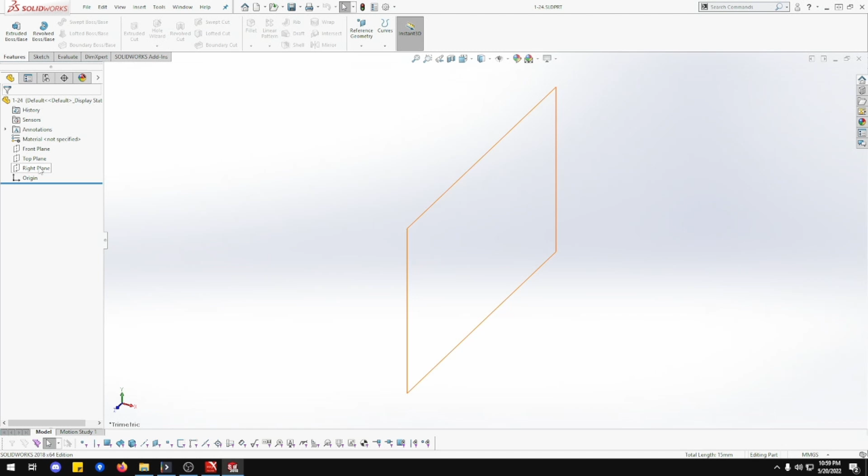So we're going to open up our template. We're going to save it. It's going to be 1-24. And we're going to go to the side view, right view, normalize, and open up sketch.

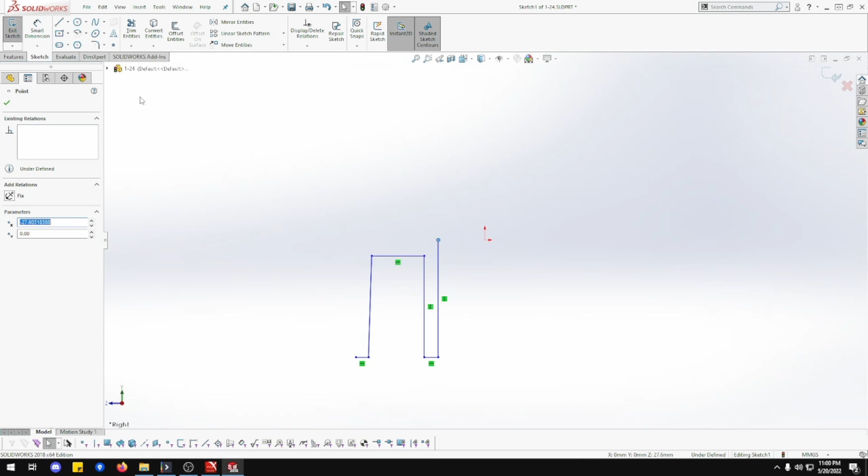So let's go to line tool. So it's going to be cross, up. It's going to be like an N, I guess. There we go.

So let me just make that parallel. This one and this one needs to stay even. Everything else should be good.

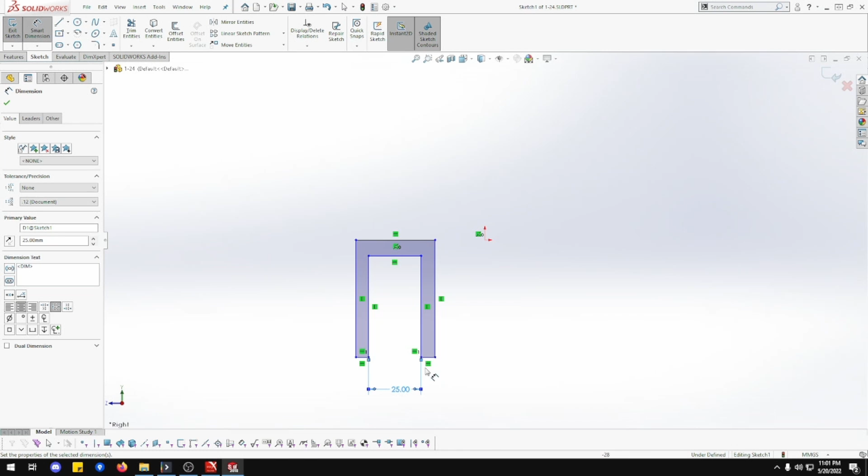Okay, so we want Smart Tool. This is going to be 25. Oop, not 25, this is going to be 3. And this is going to be 3. And these two are going to be 3. Let me zoom in so I can see better.

Okay, that's looking good. We do curve this here, but we're going to do it not the way we normally do.

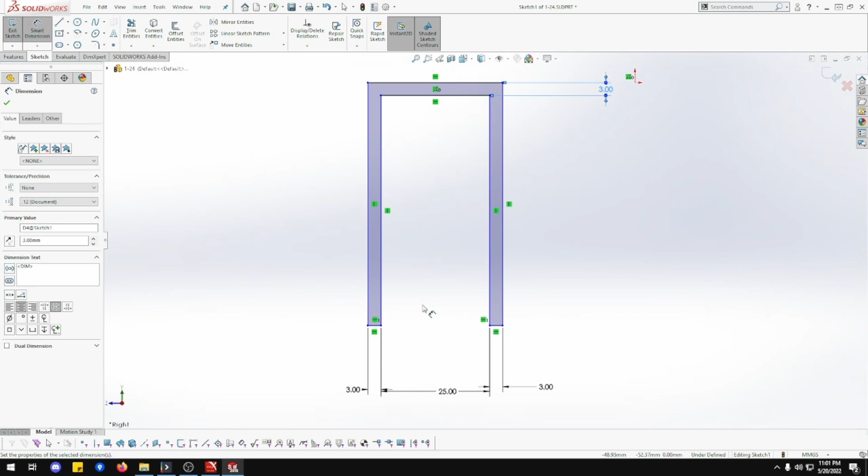Okay, we're going further. We're going to go to feature, extrude, 127, but mid-plane, and okay. There we go. That's looking good.

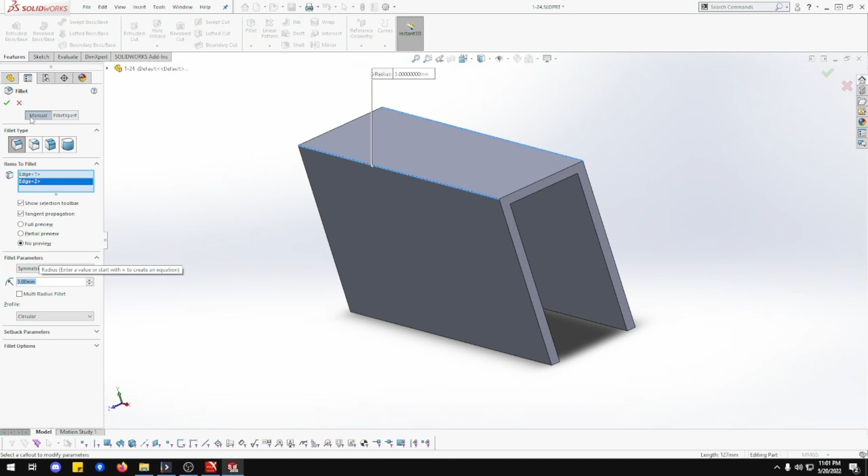Now we're going to do the fillet, which is going to be 3mm. That one and that one. And okay, there we go. That's a lot easier than doing the other way.

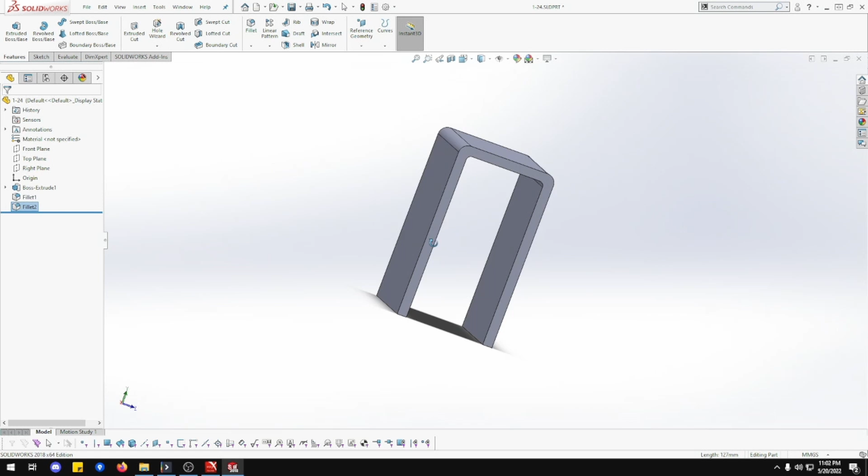So we're going to do another fillet. That one and that one, that's been 1.5, and done. See, that's a lot easier than doing it the other way I was showing. Just showing different ways you can do things so that if for some reason fillet doesn't work, you can use another way.

So, okay. Now, before we go any further, we're going to finish the top off because we want 2 holes.

And these are going to be 8mm. 8, beautiful. It's going to be equal.

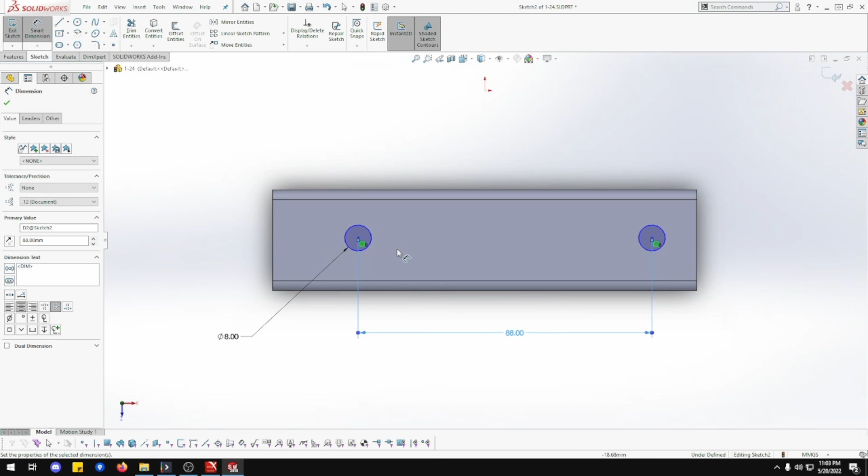Now, measurement. These two are going to be 1, 2, 88 apart. 19.5. So 15.5, that should be halfway. That was a miss. Okay, 15.5, let me just double check that. 15.5, perfect. So that's fixed, that's fixed across. Okay, everything's good.

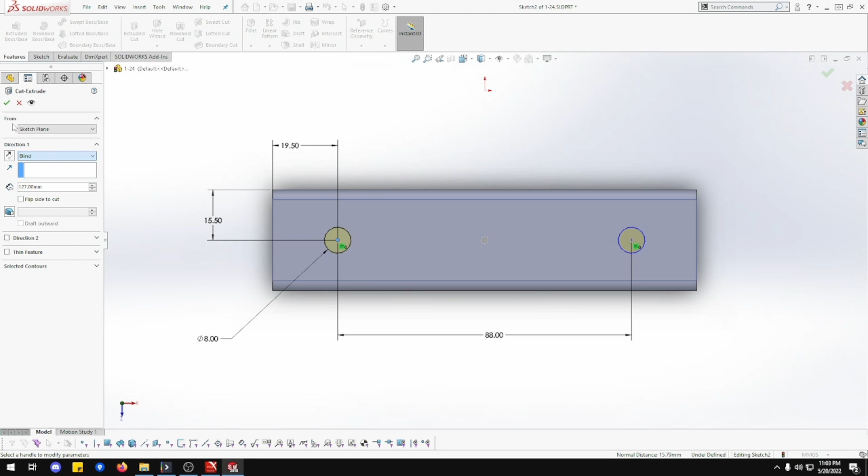So we shall extrude through all and okay. There we go, that hole's done.

Excellent. So let's go this side. Normal To and sketch. And now we are going to, okay, it's going to come down here, it's going to slide down there. Hey, hold on.

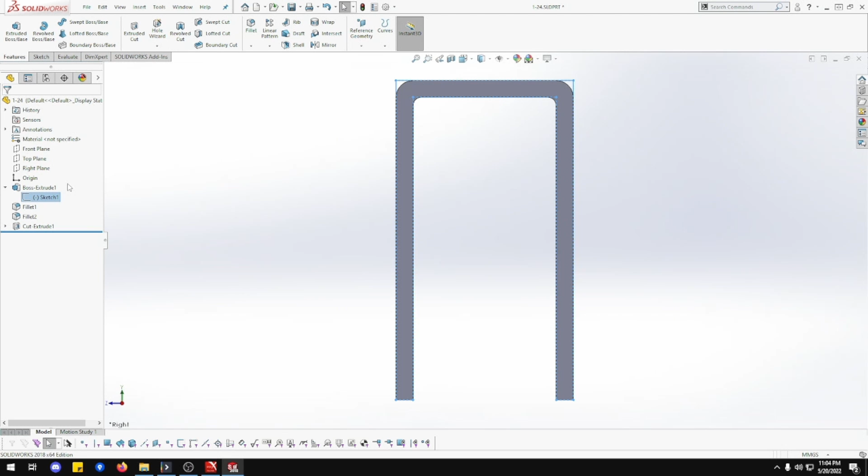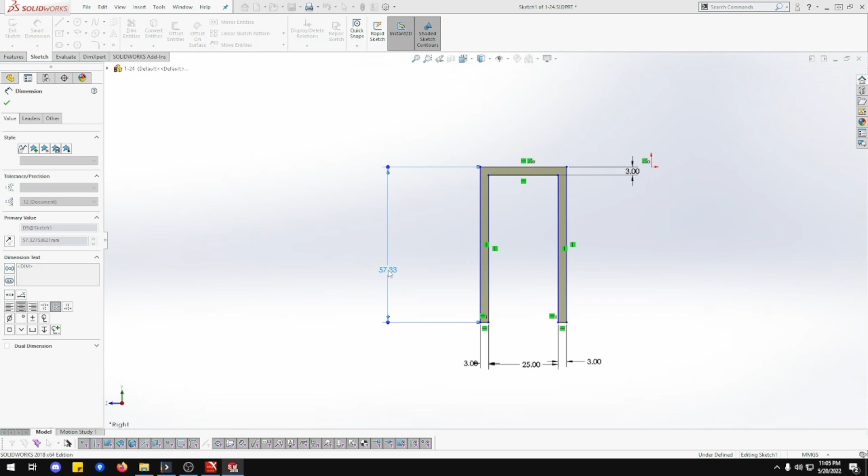So we want 76 plus 13. Wow, that makes a difference. Okay, exit. That makes a difference because the thing looked awfully short.

Okay, let's go back to this one. Normal To and sketch. That looks better. I'm thinking that doesn't look high enough.

So we want straight here. It's going to go down here. It's going to curve around there, up there. There'll be a hole here and a hole there. So the holes are 10. Let's put the holes in first. One there, one there. We just do 10. Beautiful.

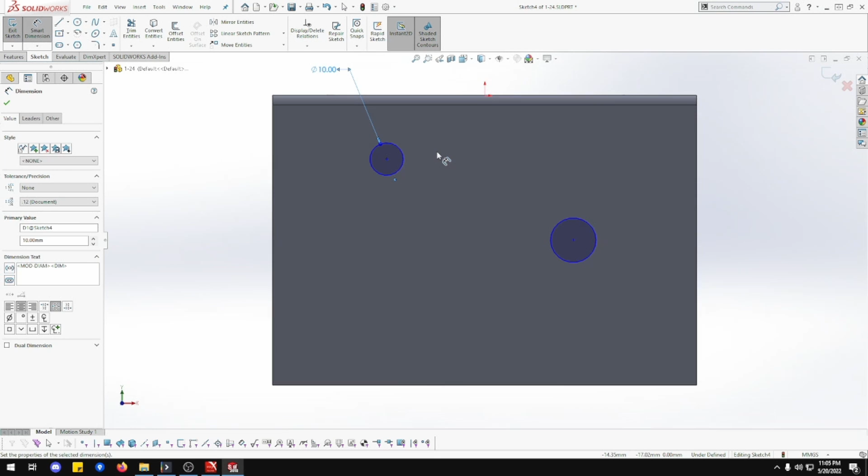Equal. Beautiful. Okay, so this hole here is going to be from there to there. It's going to be 76.

I missed that. What? Thank you, hold on. Oh, 25, right, that one should be locked now. Beautiful. Now this one, from this one to this one, is going to be 38.5.

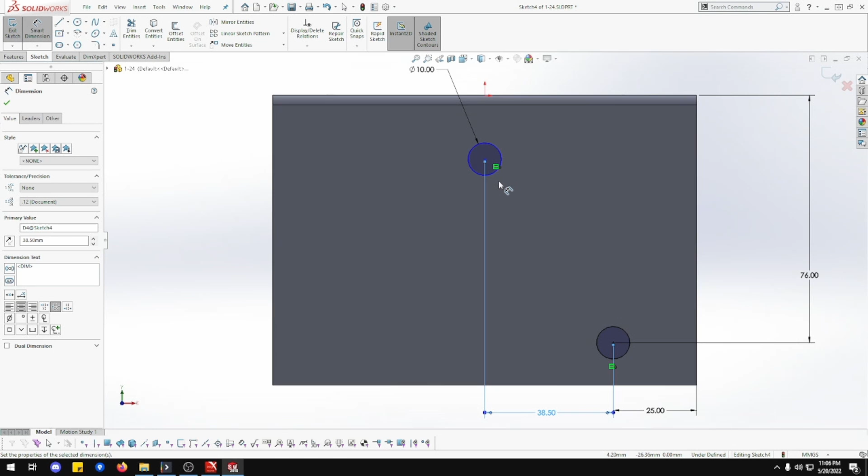Yeah, the only thing is it doesn't show the height. Although, oh I see, no I see, that's actually in the middle. So if we go from this point to this point, click that, 127 divided by 2.

Oop. Oh idiot. There's a row. That's already done though, it's this way we do it. No, oh I looked at it wrong. We all make mistakes, it does not show. Go leave that one for now, but what I do want is go from here.

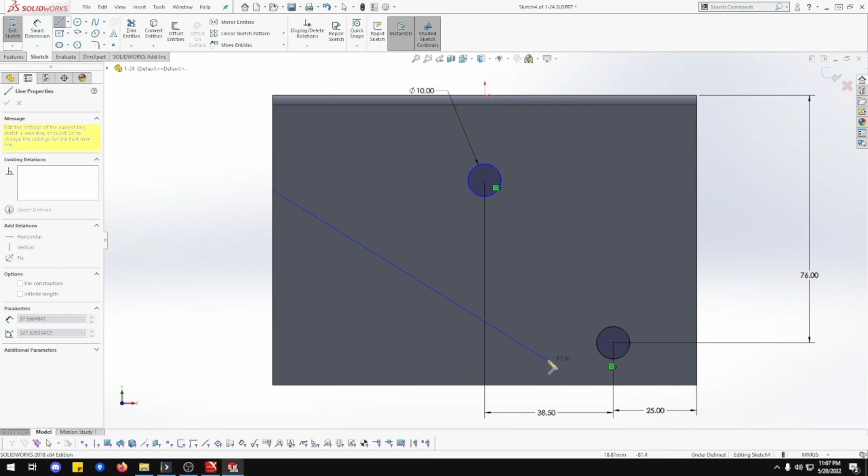Thank you. To there. That goes all the way to that corner, thank you. To there. And this is going to be a radius of 13.

So if we go to that one, that one, that one, there we go, let's make that 13. We'll use that little trick we did in one of the other videos. Yeah, I did, I didn't redo it. Oh sorry, radius 13, so diameter 26. There we go, that reached on there perfectly.

Okay, so this one and this one is going to be tangent. This one and this one's going to be tangent. Oop, that's weird. Need to make that longer. There we go, that one's going to be tangent. Beautiful, that's the shape we want.

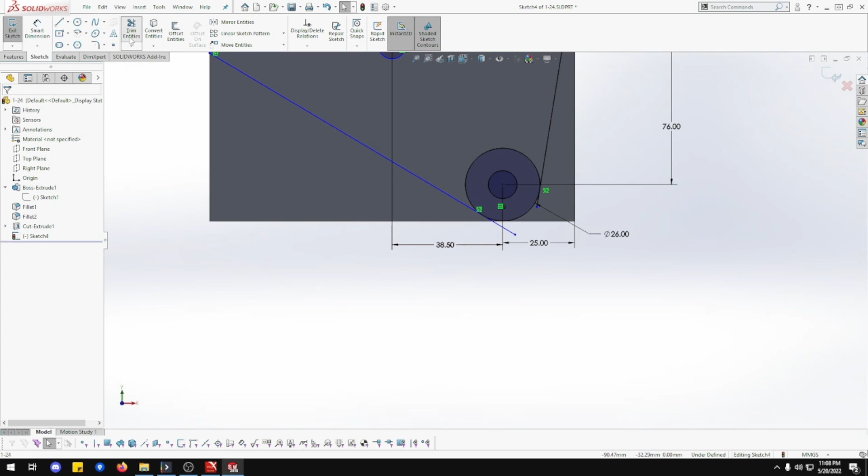That's good, so let's go trim, get rid of that. Trim, thank you, get rid of that one. Beautiful, that one. There's nothing else there, is there? Nope, don't look like it. Beautiful, that one's gone.

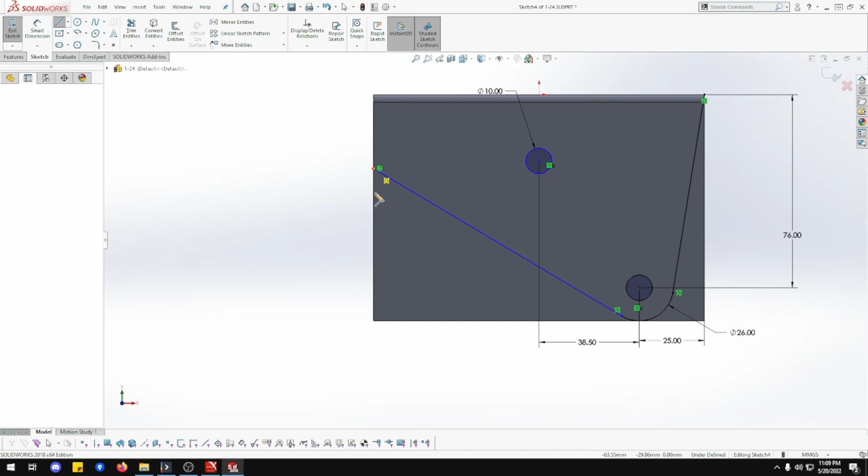Okay, that's looking good. Let's grab this line again, down to here, down to there, across there. Oop.

Yeah, okay, we're going to do something a little bit different. We're going to go... yeah, I hate that, seems like a double click. Hold on, where's that one moving? Hold on.

Grab that one, pop it there, and pop it there. There we go, so that should be good.

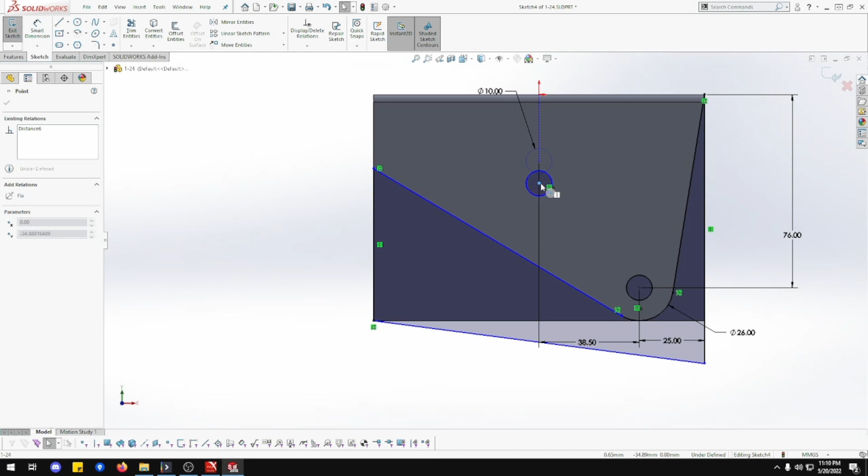This one actually shows about there somewhere. It doesn't actually show a distance, so it does make it a little bit hard. So I might have to adjust that one later on when we get further in. So just do that one now.

So there's the feature, extrude. Now the reason I went down there, if you went across there, it's closing it in, so it's causing issues. So we go outside the border.

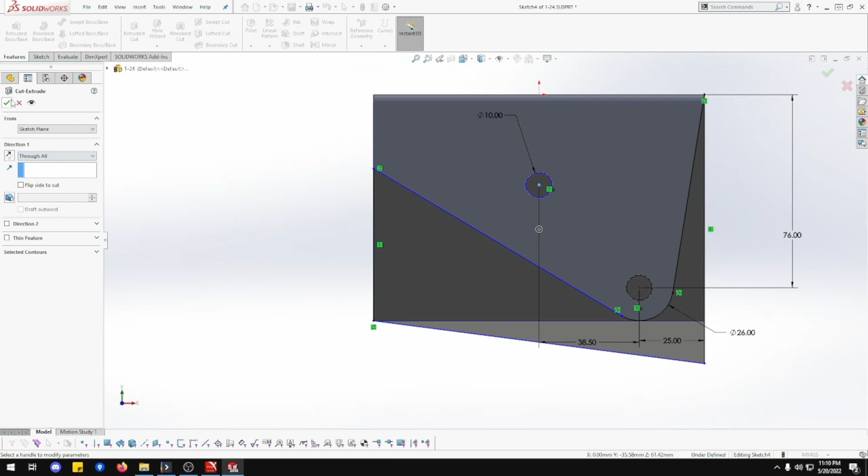Cut, through all, and okay. There we go. Beautiful, that's what we're after. Almost done, but not quite.

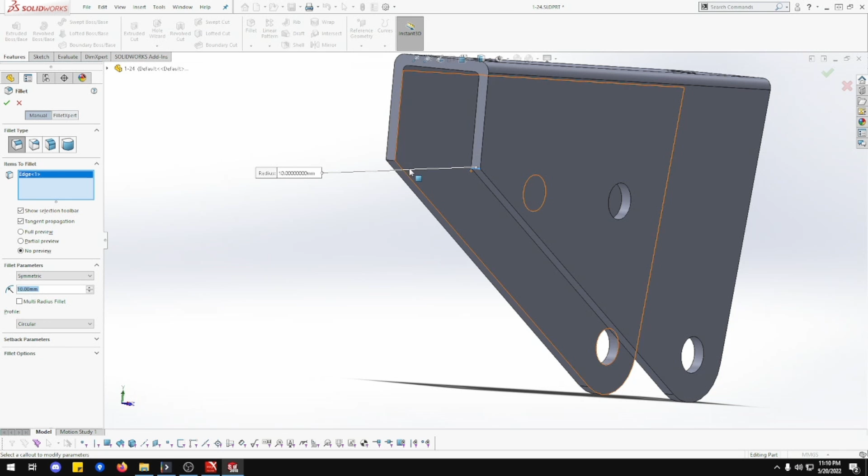We want this here, the radius is 10. Could have done that, or we just do fillet. Let's see, radius is a 10. Nope, not that one, not that one. Clear section, thank you, that one, and that one, and 10, yep. And done, there we go. And that one's done by the looks.

This hole here is unknown at the moment, doesn't have measurements there, so that's for fun later. That's for fun later. So thank you for coming along.